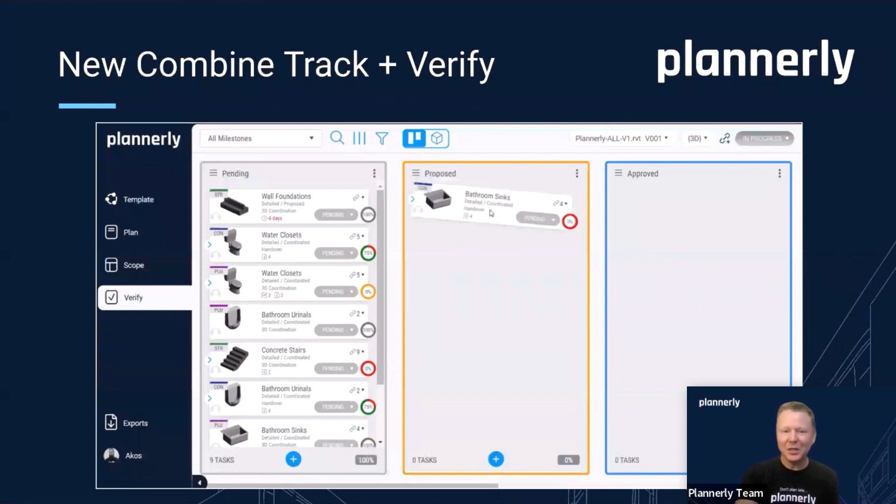The combination of the track and the verify module we will show you today, with the automation of model linking and model checking. We're really super excited about that. And we'll get to the demo.

We have new account management, so you can manage your own branding and go through the upgrade process from essential, standard, and premium. Louie will talk more about the packaging later on.

And over the number of months, we've been building some really great features. We're really super chuffed about everything from smart fields to make it quick to create documents, to activating the dependencies so you can really do a program scheduling logic.

Things like information verification rules, which have set us up now to be able to have the auto checking of models based on those values, and whether it needs to be a date and whether it needs to be...

between these dates, or a value, a number that needs to be higher than this, for example - those types of things. And lots more enterprise features as well. But I know you want to see it, so let's get to a live demo.

3 slides as we build in, just to give you a preview of those 3 modules. The first one is the plan module, and you'll see that the nav bar is on the left-hand side. So this is the look and feel of the 3 modules: plan, scope, and verify.

In the plan module, we're still using templates. We're building multiple documents. We have full version history and a built-in approval process and smart fields to make this a lot quicker. We also have some more editing features that I'll show you as we go in.

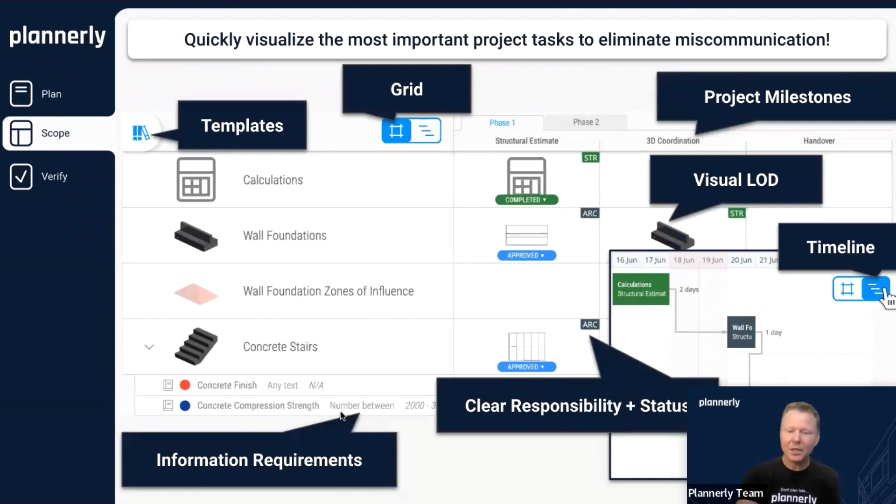The scope is the combination of a grid view and also a timeline view. So we have the scheduling view, clear responsibilities, tasks with information requirements, and rule-based checking that we can understand per milestone.

And then the verify module, we have combined the tracking - a Kanban, a lean approach to tracking tasks - and also the 3D model, checking to see whether requirements are missing, whether they're incomplete, and whether they are...

complete and correct, automatically giving you that as a percentage so that you can much more quickly connect automatically and verify.

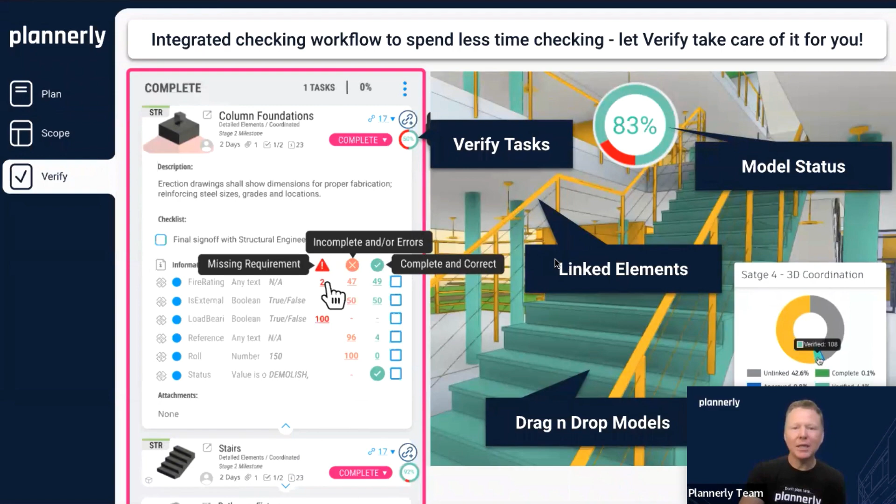I mean, essentially, it just does it for you now when you drag and drop a model in. So those are the things we will go through. Let me jump into the live software, and we can get started. Anything I missed before I jump in?

Yeah, maybe just pausing a second for the new look. So yeah, the new color. I guess in the next release it's going to be even black - probably that's where we're heading. But there is a good reason for moving everything to the side instead of having it on the top bar.

Now you have a much bigger space to actually execute and deliver the work you have to do. And even this, as you'll see as we go into the projects, you'll be able to close and just have a really narrow bar on the left side. So everything in this release is about making it more simple - making the workflow and execution part simpler, with a bigger screen to work on.

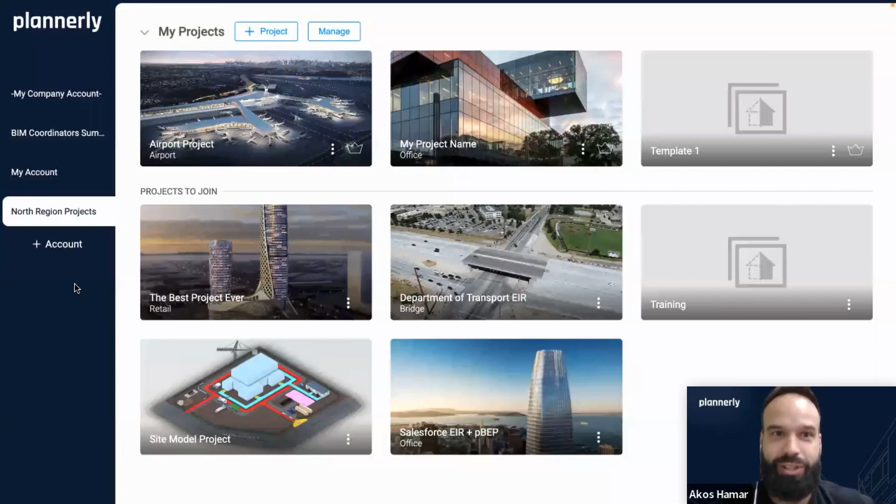And when you have multiple accounts, they could have different branding for different customers. So you could have their own branding set up in there, and you can also pick your own plan depending on what version or what you're using.

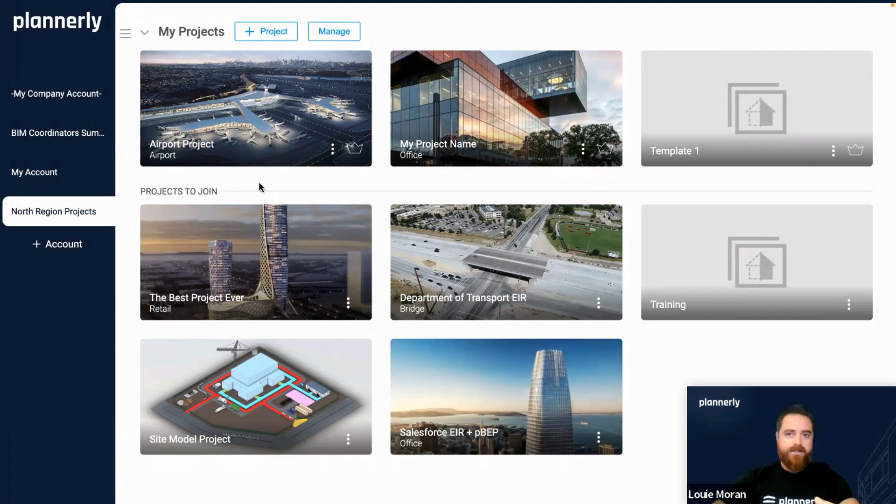The multiple accounts really help those of you who are consultants supporting multiple owners and clients, but also larger organizations - they have an account for each region. So now you can jump between your regions, Los Angeles, New York. Of course, an enterprise would have one bill for that.

But for those owners and consultants who have multiple billing, you can now create your own and get started much quicker, and even manage the branding easily between accounts.

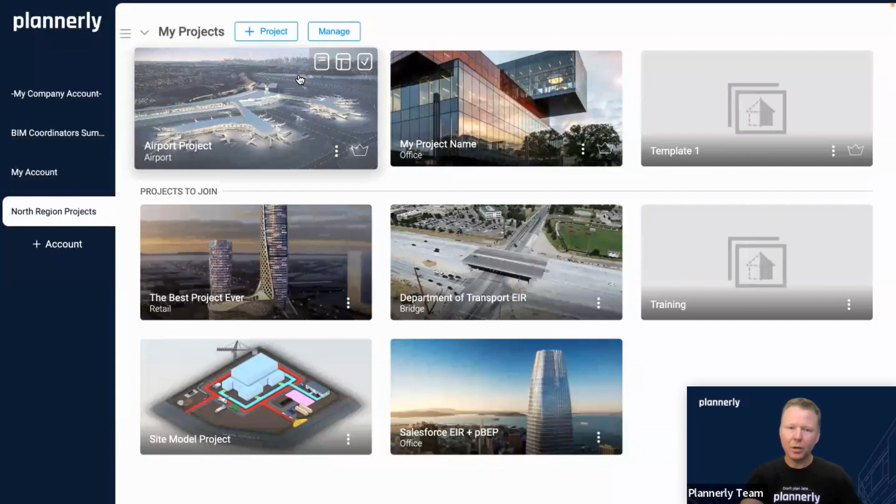Cool, so let's jump into a project. I'm going to go straight into the plan in this project. You'll see initially this is a project that hasn't got anything in it apart from a model in the verify module - that's all that's in this project at the moment.

On the left-hand side we have the library, which consolidates the view we had for the wizard, where you could add top-level documents all at the same time, or get started by creating content just by manually defining something. I could come in here and start manually adding, or we could add a document simply by dragging and dropping it.

I'm going to quickly grab a document that I have on another screen. So if you already have a document or a docx file, you can drag and drop that in, and it will create structured content from what's inside those documents. So that's two quick ways to do things.

But if you're not using your own templates at the moment, and you're using templates that are in the product, or templates from your projects, you can access them on the left-hand side. Simply by hitting the add button here, we're adding the BIM execution plan. And if I close the library, we can see the three documents we've just created quickly.

New features let you just drag these around. So if I want the BIM execution plan to be the first document, I can change that, or maybe I want to change the name, or change who has access to this document - maybe remove access from certain people so only the manager has access. Now you can see how easy it is to make those changes.

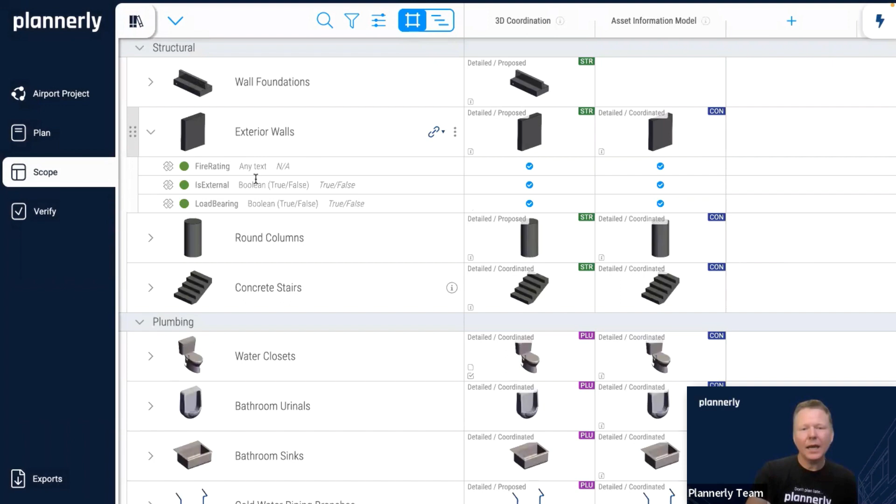We also have a set of information requirements that have been added at certain milestones in the project - really quick to do that. We can manage the information requirements at the bottom the same way. We have other ways of tagging and categorizing our P-sets so we can understand and manage these. We can bring those in from the library, a whole bunch of resources that are in this library out of the box. Some of the newer functionality in the information requirements was adding rules that have already been incorporated, but that's what's going to help us with the verification piece in the next module. That's a great point.

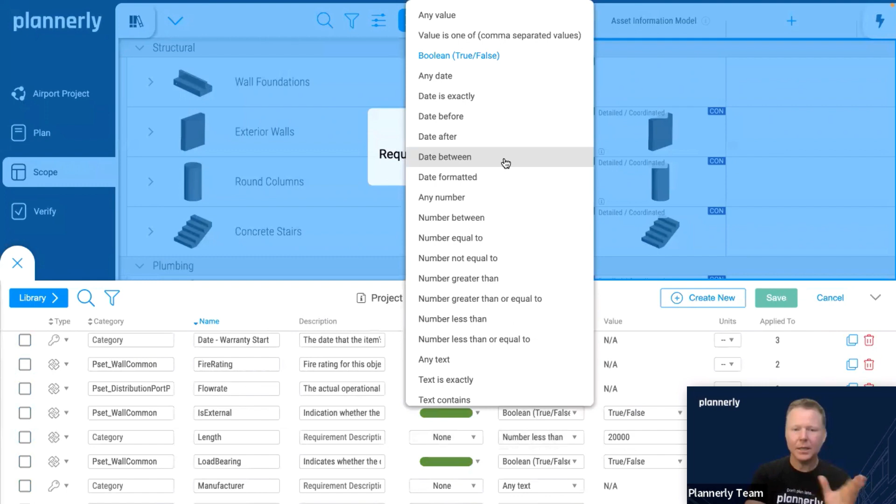So here, where we are saying that this property is external, it could be tagged, it has to be a Boolean - true or false - and these are the values that we accept, or certain numbers have to be less than this, and these are all completely editable. Everything based on the rules that you define is then checked automatically inside of the verifier.

Let's jump - actually, one other thing we talked about. Oh yeah, let's talk about the timeline view. Once we've got our tasks in a grid view, it's really powerful because we're using the same list of tasks. If we switch to the timeline view, we can see those tasks and start thinking about maybe filtering just for the asset information model. So the tasks related to the asset information model, we have filtered in the background. We could filter it by a bunch of other things, maybe the date range, etc., and now those tasks we can start to say when they're going to occur.

So I know this task is going to be here. I'm going to add a dependency between these two tasks, maybe another dependency here. Once you create the dependencies, they are forcing the dates. There are a whole bunch of other features in here related to forcing constraints, so we might want to say that it must start on this date, must finish on this date, a whole bunch of other really detailed constraints.

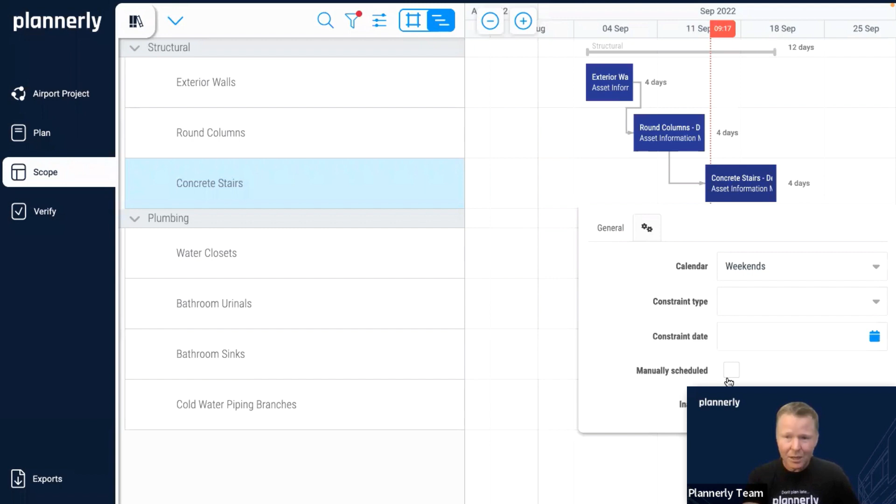You might say it's manually scheduled, so it ignores the dependencies. There's a whole bunch of things in here, but in principle, it's your timeline that looks and feels like the same list in the scope. And even if you want to, we can have a compact view that makes it look and feel like a traditional Gantt chart scheduling tool as well.

Let's jump to the verify module, which is where some of the magic happens. This is the part where if we've got a 3D model, this 3D model is already in and loaded. We used to have a very manual process of picking what you want to link and linking to cards, which obviously is not very quick.

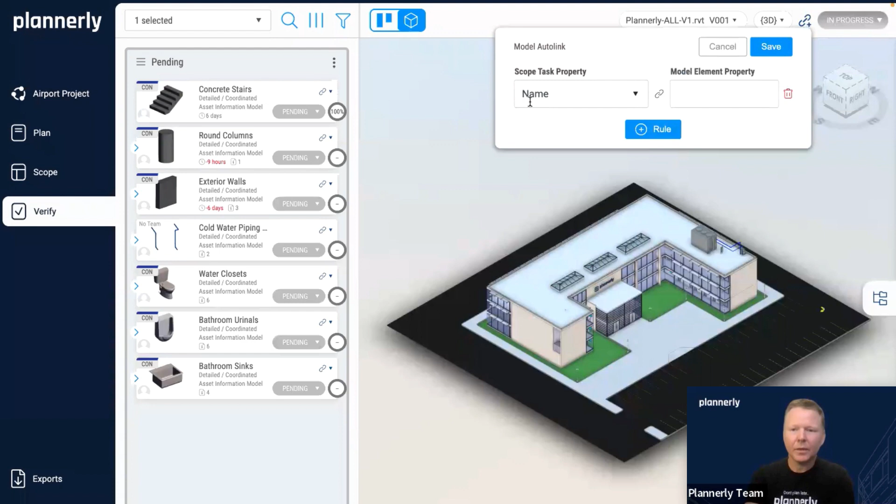But now, if at the model level, there are 3 ways to add rule-based linking. At the model level, if we add a rule that says the name of the task, if it matches something, a model property, and I think in this case, the best way to do that is to use a type name. It's a Revit model, so the type name would probably be the best choice for this.

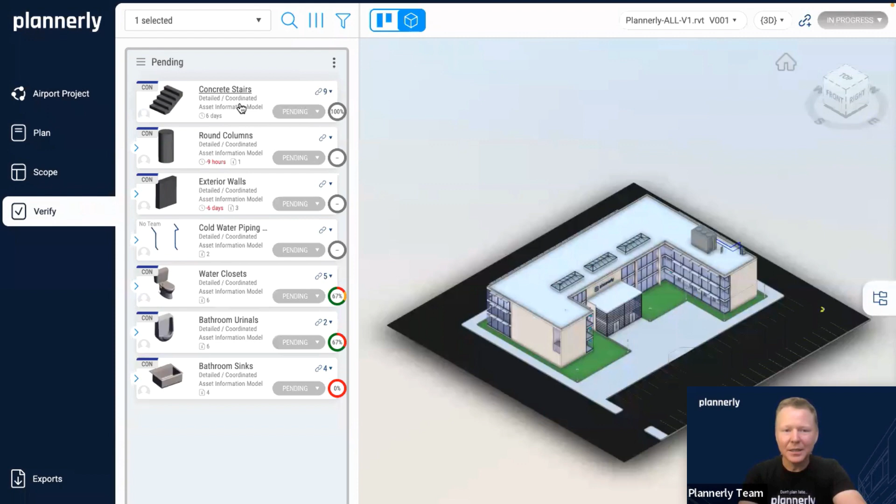So now it checks the requirements, and we can see that some of these have been linked up automatically. The concrete stairs are linked, the water closets are linked, the urinals are linked, and the bathroom sinks are linked. Let me move these to the top so we can see the ones that are linked together, and you can also see that there are percentages.

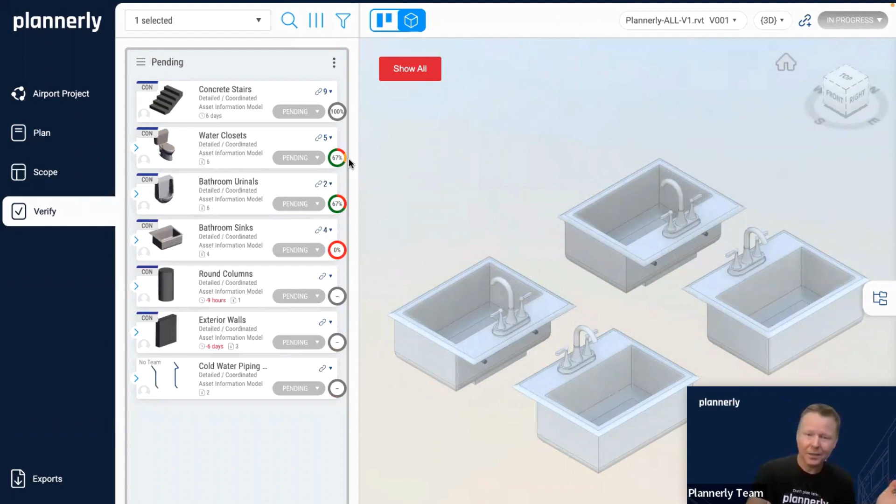The percentages show how much of the properties that were required are completed in accordance with the rules that we have defined. So in the example here with the water closets, we can see that there are certain properties that have been required, and some of them have been - system classification must be one of these. Unfortunately, the property is there on each of the elements, but it is not present in the right way.

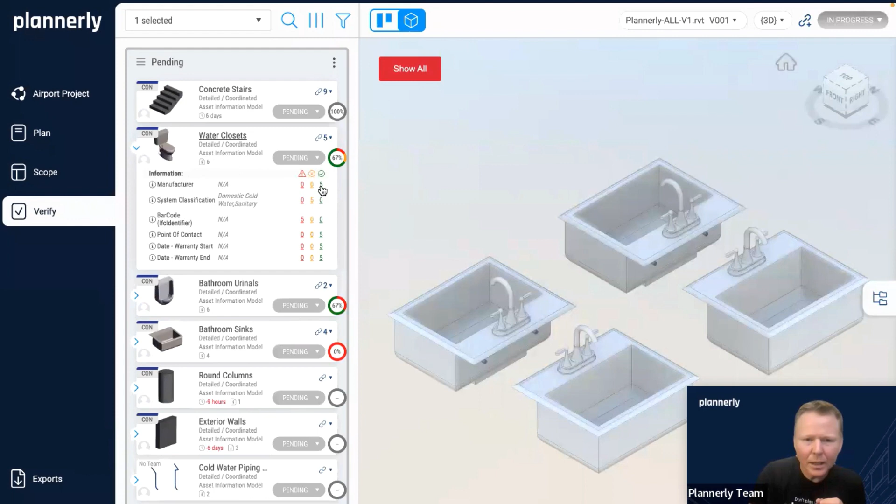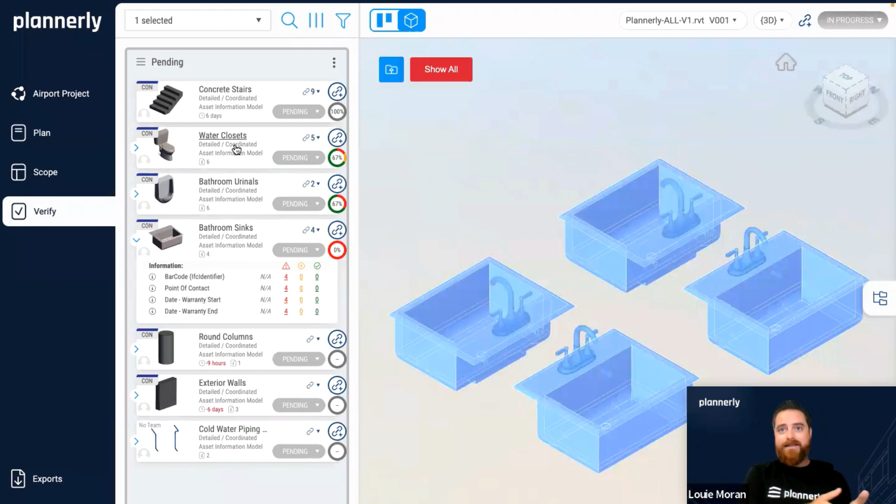We will have some tooltips on here as well, but you can basically see and identify which ones are accurate and which ones are not. The red helps you to see if the information requirement is not there. The orange would tell you if it is there, if the value is incorrect or doesn't meet the rules that you set in the scope module, which was your information rules. And then the green ones let you know, or you can select to isolate the ones that are correct, or your total that are correct.

So I mentioned that there are 3 ways to link in rule-based. One of them is at the model level, so that automatically added properties or links to all of these and checked them.

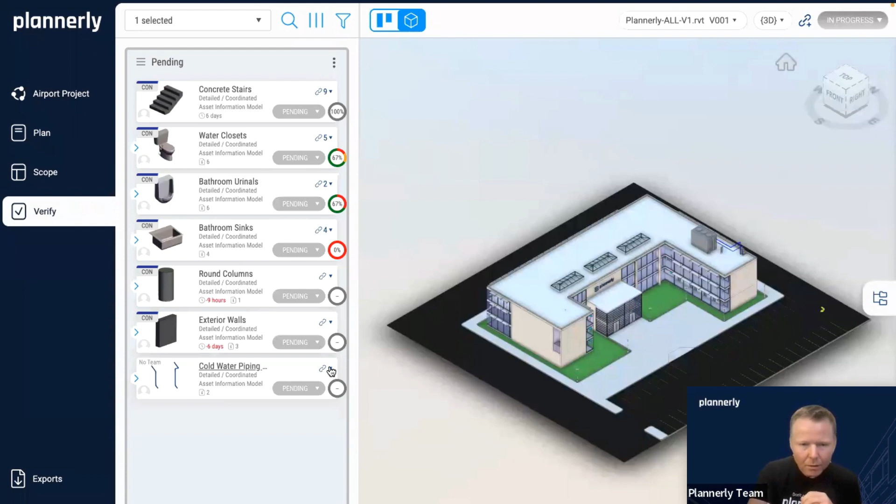Another one is, maybe if we want to see, let's do the cold water piping as an example. The model rule didn't actually catch anything, but we can add a task rule here. That task rule might be something like - Louie, help me out, what were we linking here? System name. So if I link the system name and I say this is domestic cold water 1, cold water.

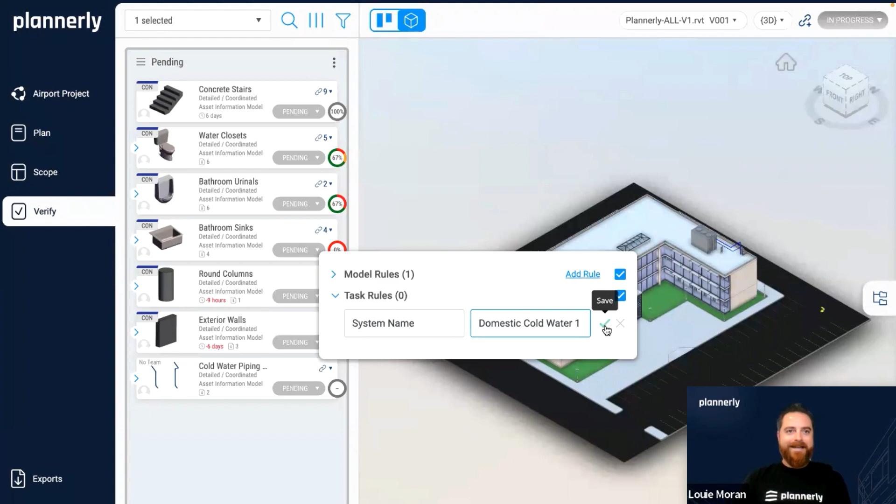For you MEP folks who go through the properties of all these system checks, this would be an important one, but this is how you would capture not only just piping, but you can potentially capture assets, sinks and toilets that are part of the system to capture it into a certain task.

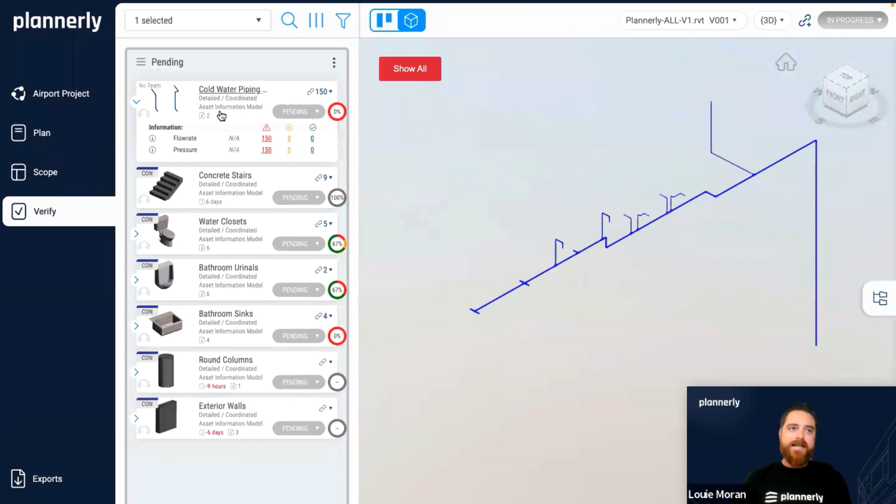And we can see with this example that we've linked the elements. We can see them here. Unfortunately, these properties, the flow rate and the pressure, are not present on any of the elements, so this is something that we would then go through the process of fixing.

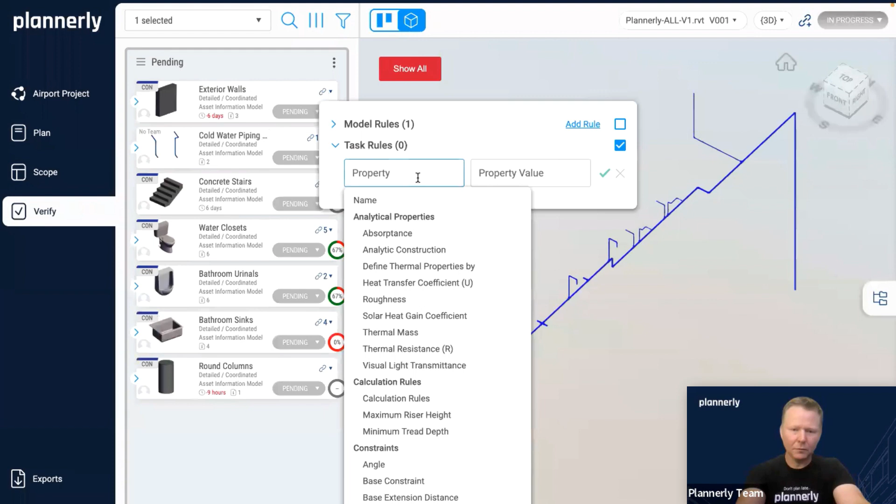Let me just do the last one here. So for the exterior walls, I'm going to say with a task rule that the property of function - so the function is exterior. So what this is going to do is find all of the things in the model with this property and link it to this task.

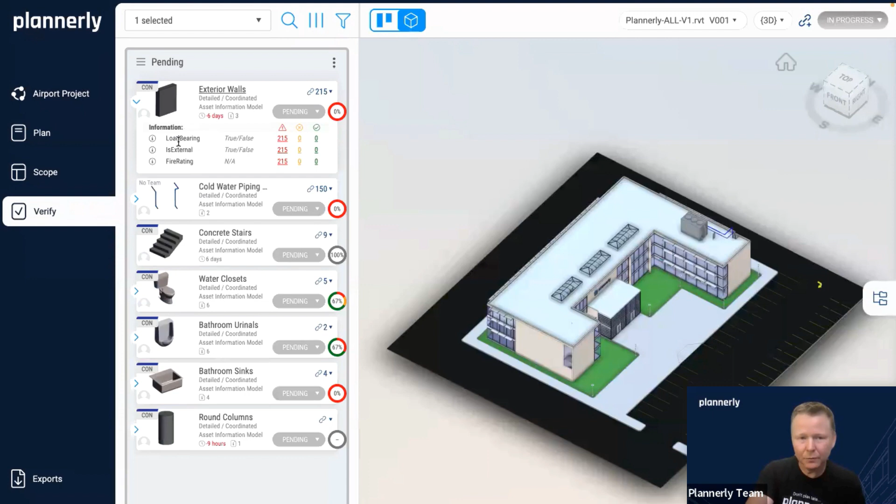So now we've got exterior walls. Again, unfortunately, the exterior walls do not all have the properties that we are looking for - load bearing, is external, fire rating, etc. And if I link and visualize this, this is kind of like the big aha moment - oh dear, these are not all external walls. So very quickly we can see that properties are incorrectly added.

Here, this is a wall element that if we bring up the properties just for that wall, we can see - where did I look at? Oh, I'm looking.

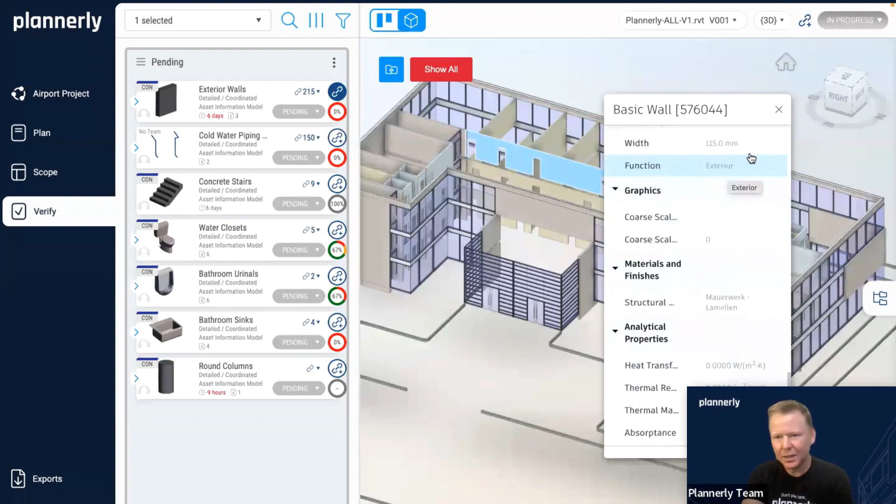The function exterior is incorrect in this case. There might be different ways of adding these as IFC-based requirements, but here it was function exterior. This is not an exterior wall, and we would want to do something about this.

So there might be some things we are happy with, and we start to say, I'm happy with these. They are going away. Maybe some of these need... we are saying that they're complete. Some of them, though, this exterior walls one is definitely not correct.

We would want to now assign this potentially to a team member. I'm going to say, Louie, please can you fix this? I'll mention Louie and say, Louie, please take a look at this, and he will get a notification. I could either change the status in here, or if I'm in here, I can—so you can see this is now assigned to Louie, and I'm going to say that this is in a fixes column.

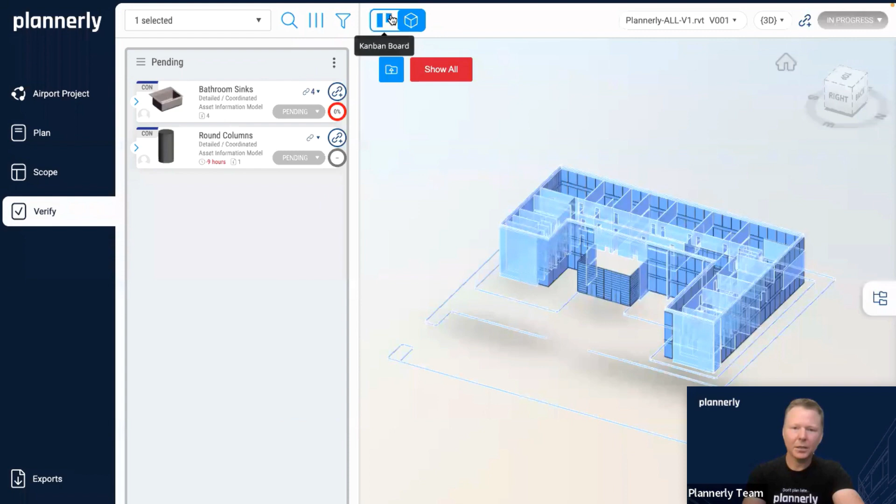Let's go back to the view with everything. If we see where all these tasks are, we can see very quickly and easily where they are. And then other features as well.

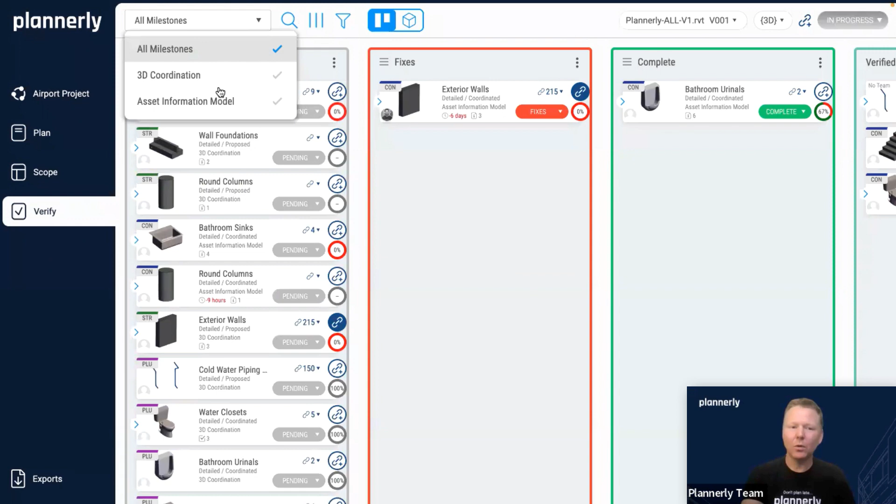I know we're running out of time and we've got more slides to go. So just like with team member, we've now got not only the ability to see all milestones in the same view—so we can put all milestones in the same view or filter by milestone—but we're also able to group by other groupings. Not just status, but if we said group by team member, this is now a really quick way to give Louie a lot of tasks, basically.

Give myself a task as well. So you can start to see how this is working, and Akosh, you can have a task.

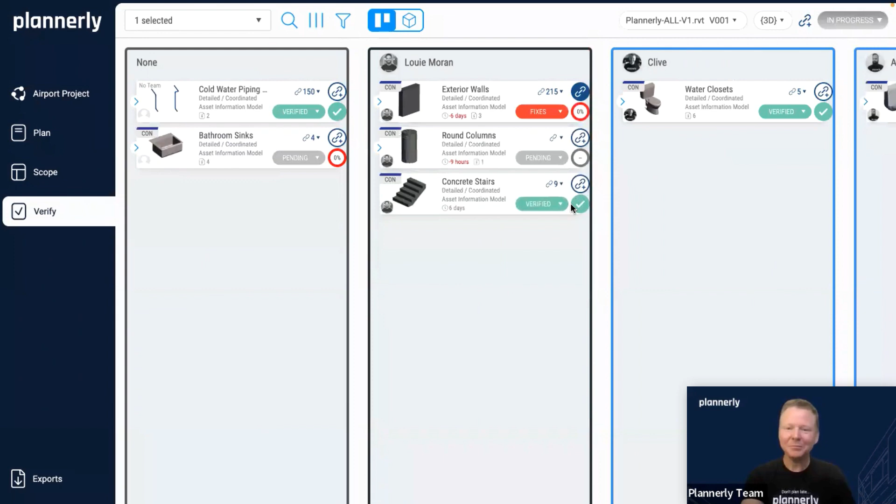There's loads more we could cover, but in principle, this model version that we have in here, we want to release it and tell people that it is published and authorized for use. That would be the final step—confirming that model is now available—and then that would provide a download link to others.

There's still a couple things I think we wanted to cover on the model linking. So there's the 3 levels, which was at the model level, where you set a rule per model.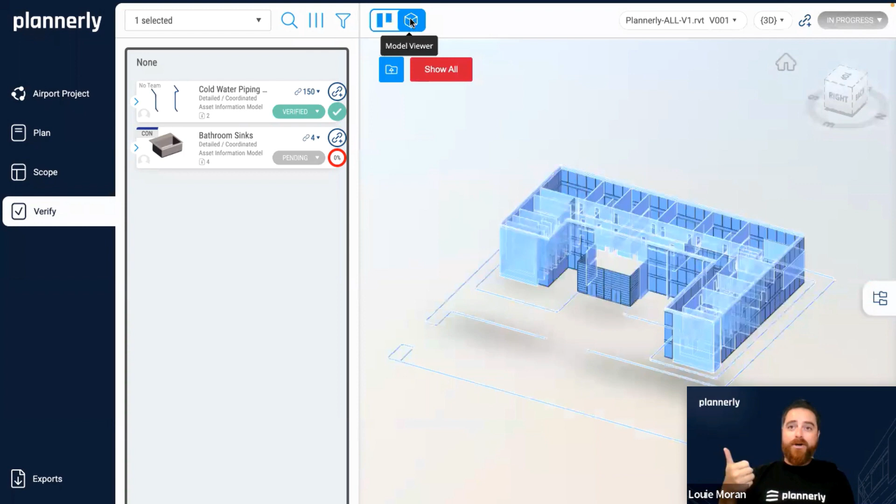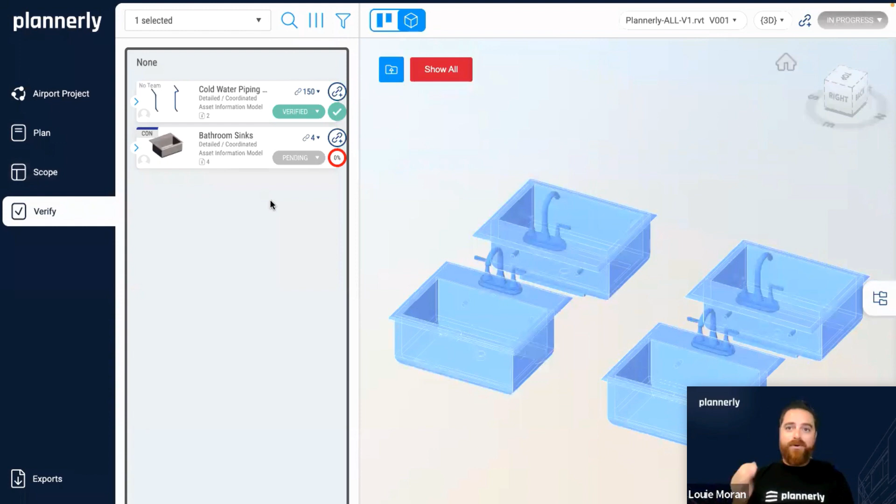At the task level, which is what Clive just showed, these are important because in the future you will be able to import those from other projects, so doing that once in a template will come in very handy. But also potentially you just want to select a couple manually, either from the tree or selecting a few items and then assigning it to a task.

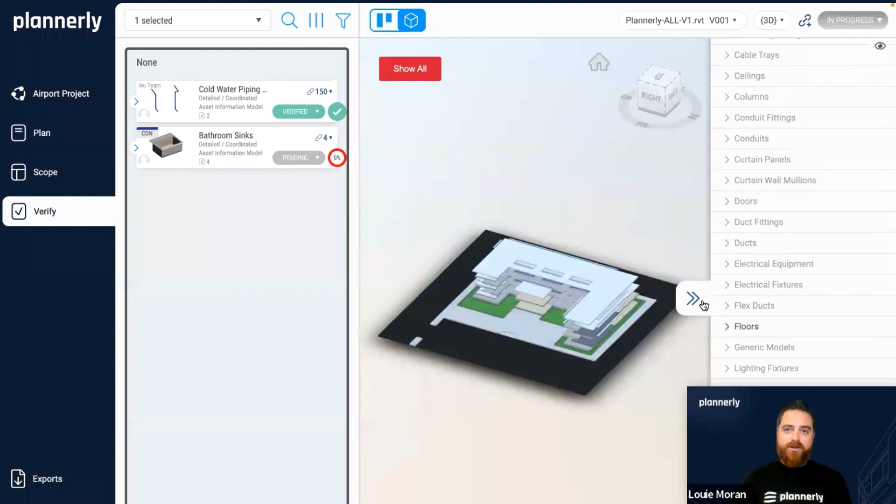You could even use the selection tool at the bottom left to select and grab elements or content that you are currently viewing, and then link that to a task. So those are the 3 different ways that you can link.

Perfect. Yeah, we didn't mention this as well—this is a new tool to be able to select, and we could just select, for example, these elements and then manually link these to a specific task.

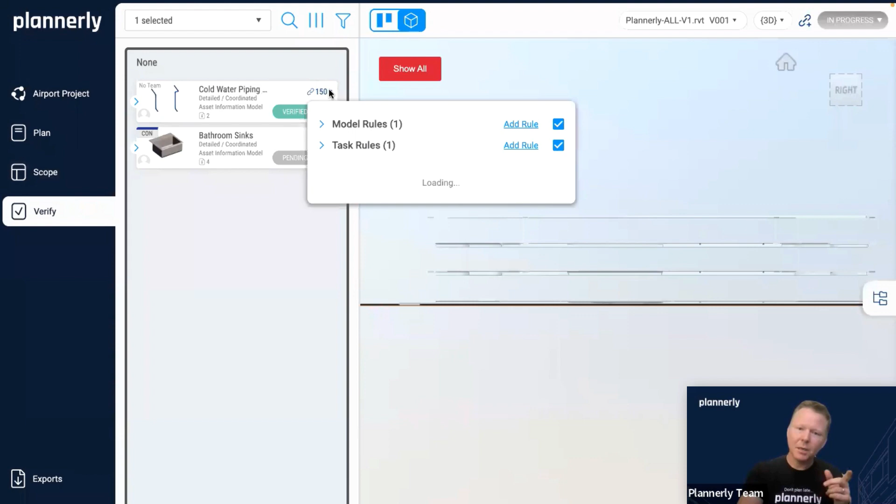And I think the point you made just then, Louie, about this transferring from project to project—the concept of putting task rules in, once that is a task rule, so for cold water piping, if you import a scope the next time, let's go back to the grid view, and we look at cold water piping and expand that, this will now have that link on from the previous project.

So you're essentially building scope, starting to add model rules and defining standards for people to follow. And as you're building this on a project, what's happening is—I don't know whether to call it machine learning—but it's learning, so that the next project it will use those rules and you won't have to apply them yourself.

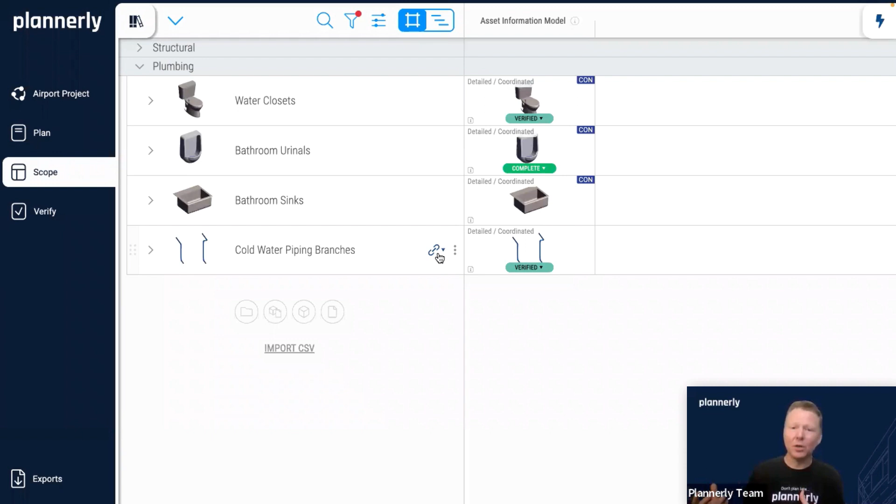We've got a lot of resources, so let's quickly... I know time is up, we get too excited about the demo, but hopefully that was useful for you. We're really excited about launching this one—it's going through the final throes of the quality assurance process.

So as you guys start using it, if you see things you'd like us to build on top of, more features, that's what we're ready for - API, BCF, really understanding integrations and how we're moving forward.

Training resources - there will be a new website with more content and resources for training. There's the 5 BIM bloggers, a cool blog with more product related content from these guys. The tips and tricks series is there too, still relevant, and the ISO 19650 series. All these links will be plugged into the chat.

Akosh is on that right now. So if you're interested in getting trained, audited and certified, let us know.

We now have a licensed associate program for our partners around the world. There are 300 plus partners being accredited to give certification for ISO 19650 through a UK based partnership that we have. That's pretty exciting.